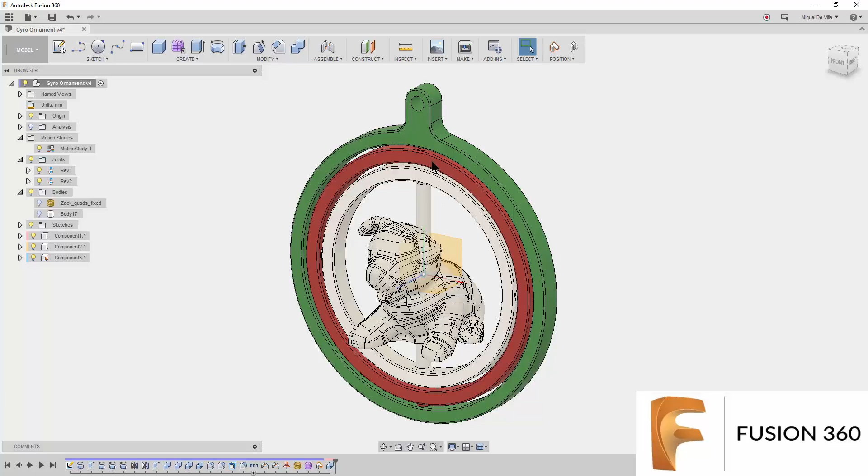Today we'll be dealing with the topic of scan data, how to bring it into Fusion 360, how to work with it, what are the different types, and what are some of the advantages of these different design methods. We'll be making this ornament today. It's a little gyroscopic spinner that has a scanned stuffed toy in the middle.

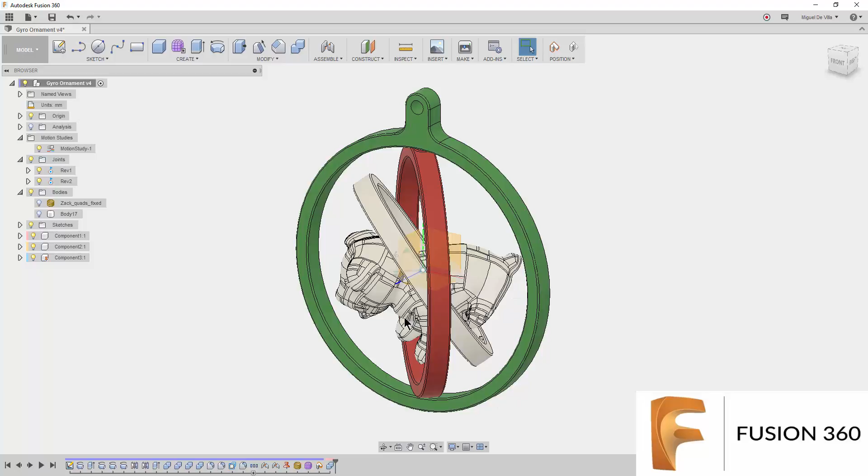So you can easily adapt this design and put anything you want in the middle, and it's just a nice way of integrating something very functional and something very customizable into a single design. So without further ado, let's get started. As in our previous video, we always start with our data set.

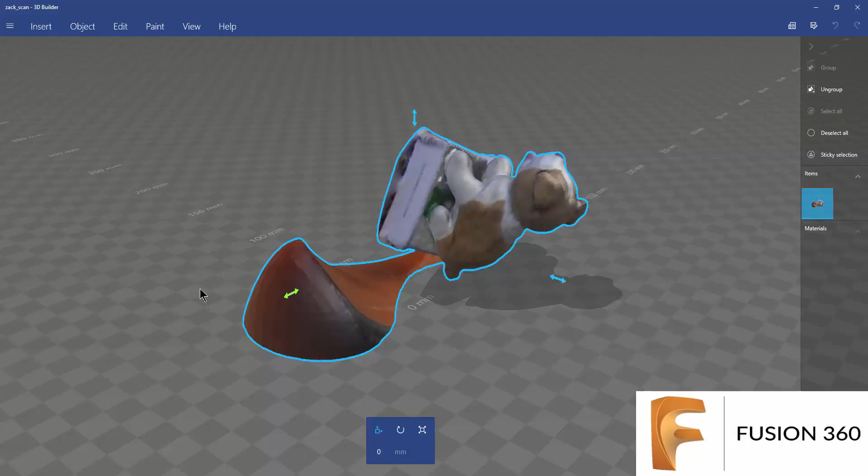For this tutorial, I have selected this dataset. It is a scan I made using an old Xbox 360 Kinect that I hooked up to my computer, and it was of this stuffed toy they had in my workplace. It's nice and cute, but unfortunately, since I had to mount it high up on an orange chair and a couple of boxes in order to bring it up to the Kinect sensor height, I captured a lot of unnecessary detail that I'd like to remove before I bring it into Fusion 360.

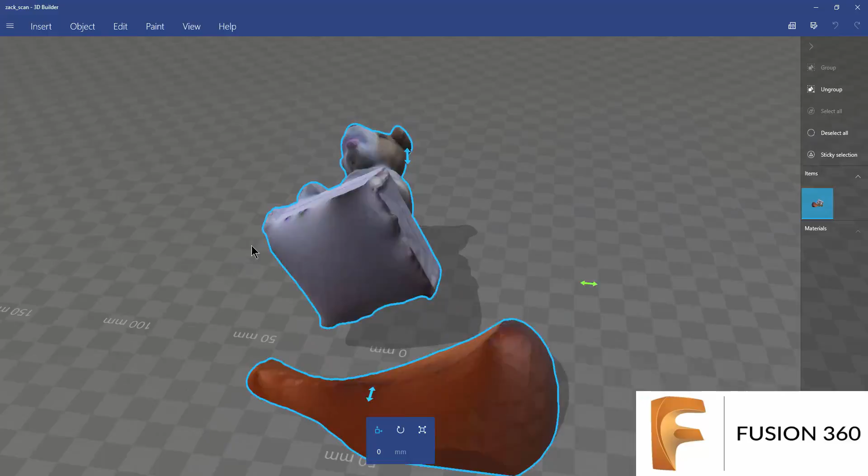We'll be using ReMake for that, and as you must know, just because we see that it's nice and clean and apparently solid doesn't mean it's quite ready to bring into Fusion yet, even if we do remove all the extra parts. There could still be a lot of holes, intersections, and just general particles throughout this model that would make it difficult for Fusion to process.

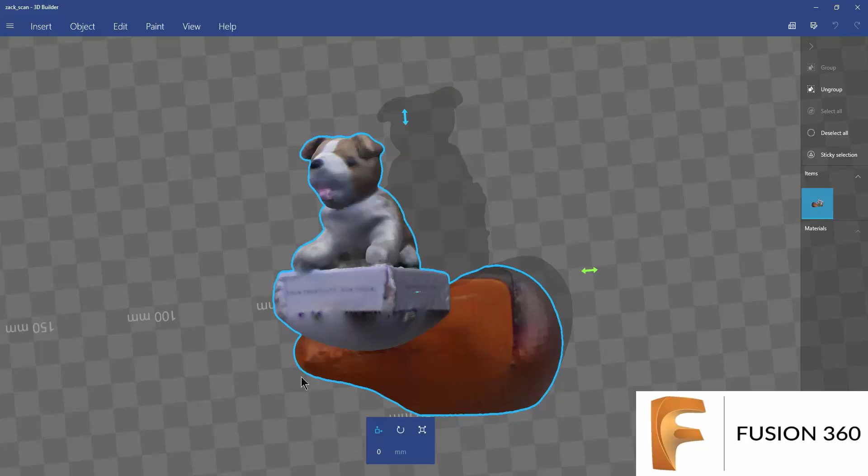What we're going to be doing today is a little different from part 1. We are going to be taking this mesh and turning it into a quad mesh. What is a quad mesh, you must ask? Well, let's switch into ReMake real quick, and I'll show you what I mean. Here's our model in ReMake, and as you can see, it looks roughly the same, except just without color. So let me switch over the visualization and bring up the wireframe, and you'll notice that it's made of a ton of triangles. What does this mean?

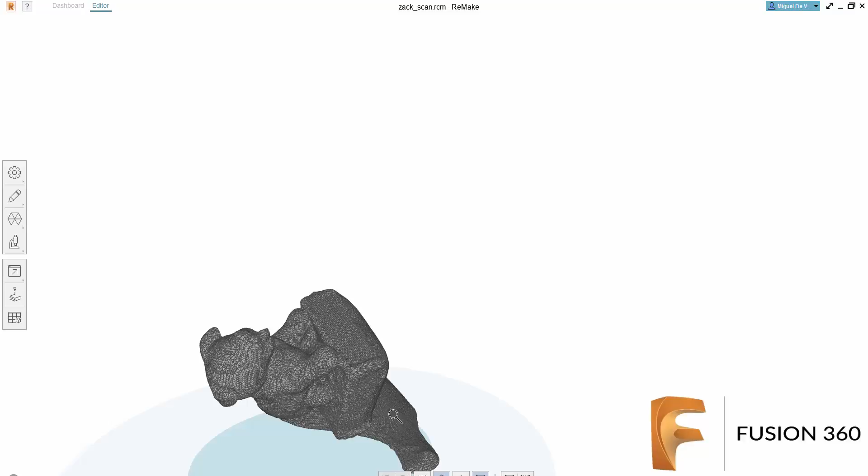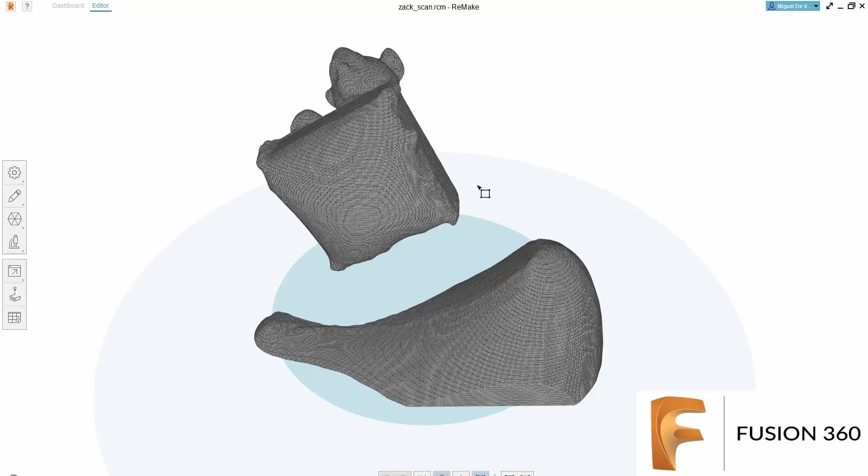Well, much like how objects on your screen are represented by pixels, almost all 3D objects and models are created of polygons. There are two very common formats. One is a triangle mesh, and the other is a quad mesh. As you might be able to tell from their names, a triangle mesh is made up of tons of tiny triangles that connect to each other. These are generally advantageous when you want to capture very fine curvature and detail.

However, they are much harder to work with in terms of meshing because you are only able to use tools like, say, Meshmixer, where you can push, pull, and extrude, and it's not necessarily parametric like we're used to modeling in Fusion. Quads, on the other hand, are, as the name implies, made up of tons of tiny squares.

What they lack in the ability to capture detail due to the need for these squares to be uniform in order to complete a solid mesh, they make up for in what they can be converted into. Very often they can be converted into these things called T-splines, which you should be familiar with if you've spent any time in the Sculpt environment in Fusion, as well as Maya or 3ds Max. These modeling tools use these T-splines so that you can push, pull, and do various other transformations very easily onto these shapes. That's what we will be doing today.

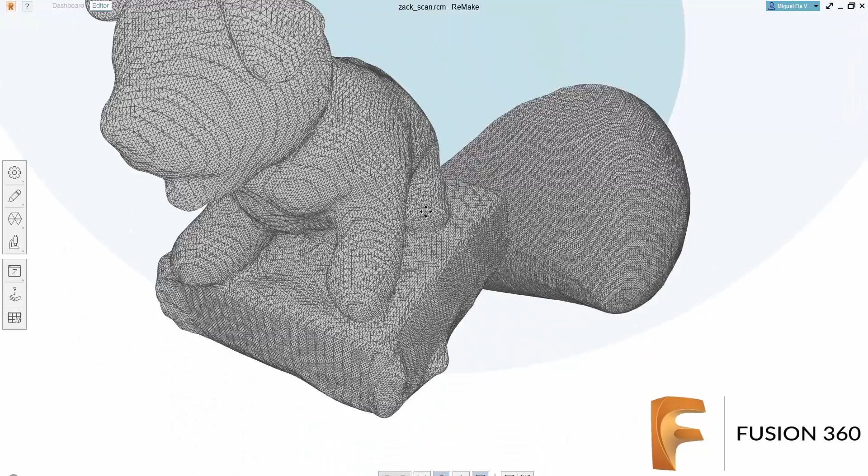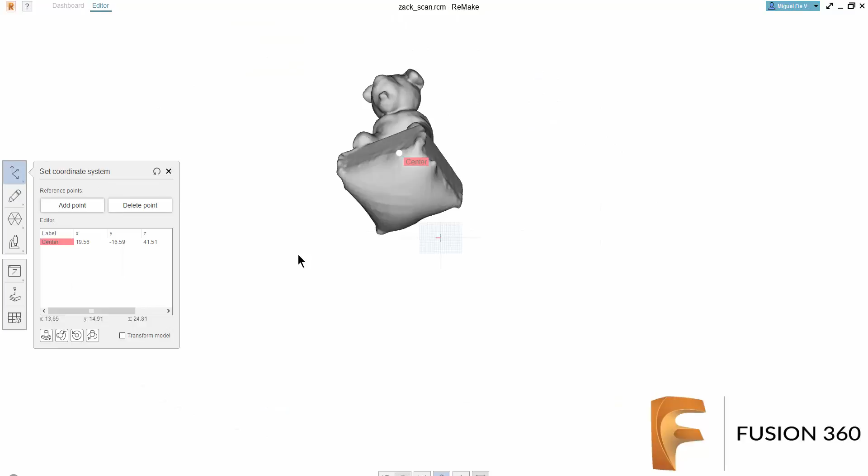We are going to be converting this stuffed toy into a quad mesh so that we can bring it into Fusion as a T-spline body and as a solid. So, without further ado, let's get started. We'll use the lasso tool to quickly select out this huge particle. To make things easier on ourselves, we're going to reset the coordinate system very quickly.

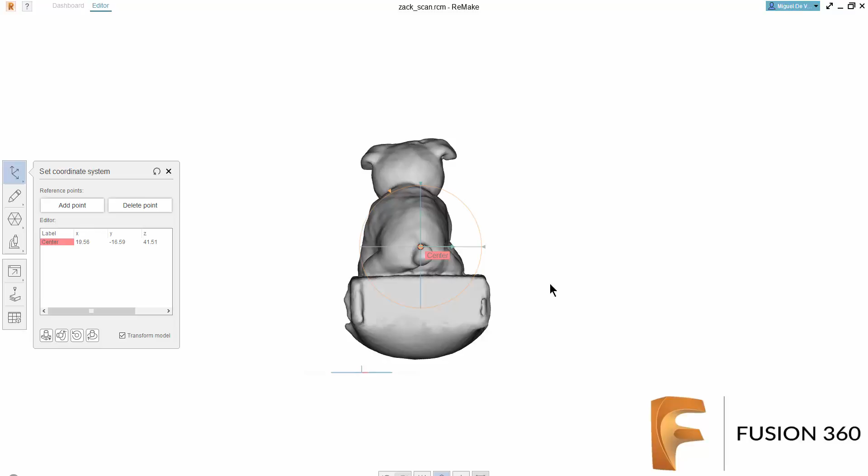And you don't have to do this. I just like to do this because I find it makes modeling a lot easier if everything is right side up, like it should be. And you don't have to be precise. Just good enough is fine. So we're going to use the slice and fill tool to quickly remove that box portion.

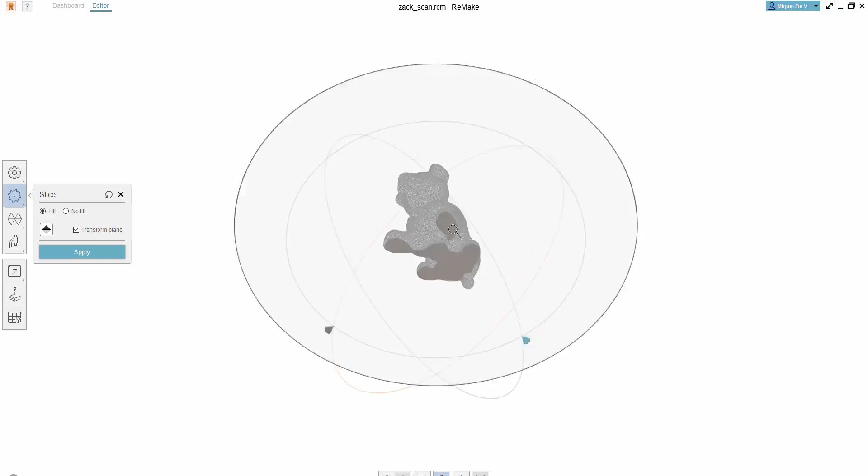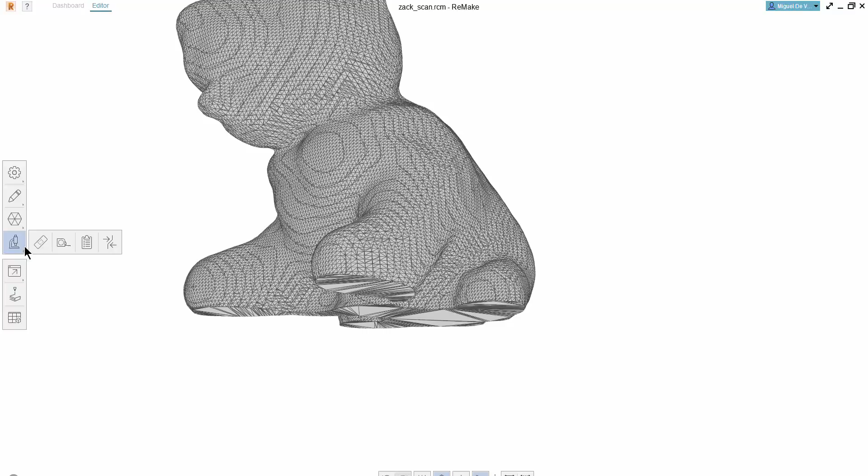Let's orient ourselves a little bit. And what this will do is it'll cut off that portion of the box there and seal up the bottom of this file. Because what we always want is a solid watertight mesh, meaning there's no holes, particles, or intersections. Hit apply, make sure it fills, and boom, we seem to have a solid mesh. Let's run through the analysis portion, make sure everything's all right.

Okay, it looks like no model defects have been detected. And what we'll do now is, under export, we have a bunch of different options: image, video, model. We want to export the model as OBJ quads. You'll notice that under quick export, it already has it. Remake is familiar with this workflow and supports exporting out into OBJ quads for Fusion 360.

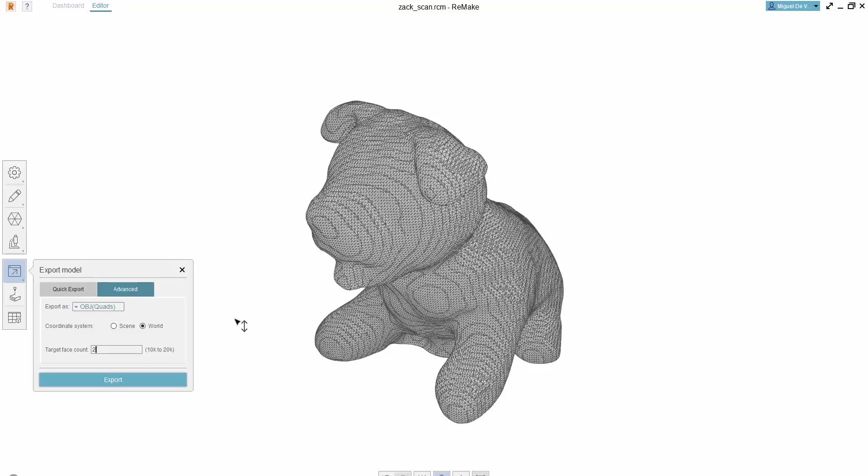The maximum right now is 20,000 faces, so we're going to go into advanced, select 20,000, because we want good quality. Because the more faces you have, the more detail you can capture, even if it means a little more processing time. Now I would normally hit export and just let this wait. This can be a very time-intensive process because it has to retopologize and redraw this entire shape with as little error as possible.

So what I've done is I've prepared what this will look like once I convert it the first time. So let's open that up. And I renamed it Zack Quads. Always good to rename your files appropriately. Don't save.

Excellent. Now you'll see that it looks a little, shall we say, lumpier, a little smoother. And this tends to happen when you retopologize something into quads. It just loses a bit of resolution. Especially since, if you noticed earlier, we had 80,000 faces, and we just decimated that down to a quarter.

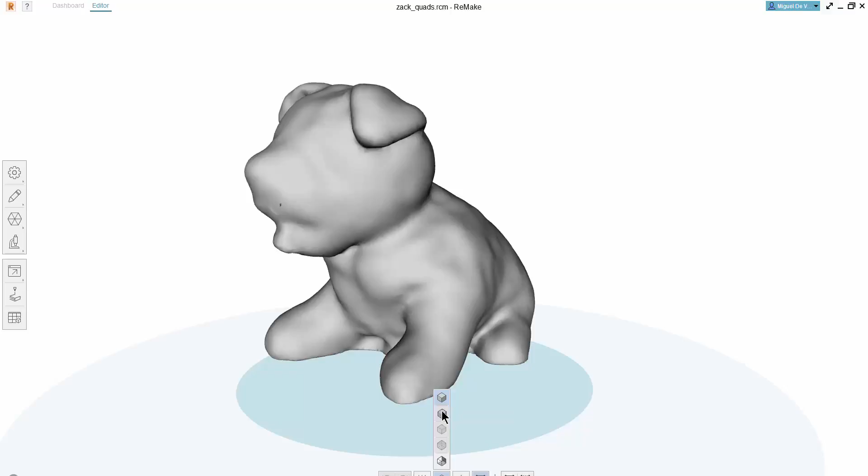You'll notice that it seems to still be in triangles. Well, don't worry. If we look at the solid again, and just try and take a peek at the mesh, you'll notice that it generally looks a bit squarish. Remake likes to auto-convert all these square polygons back into triangles for its mesh editing tools. But believe me, it is still a quad mesh.

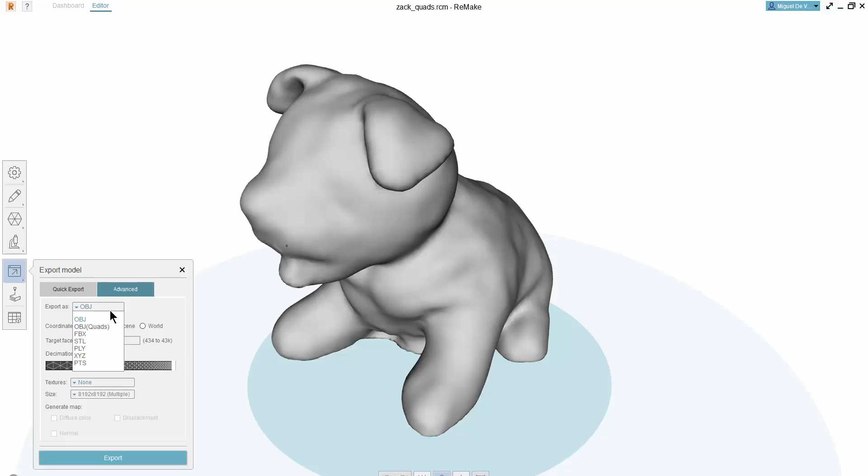However, because it had to redraw everything, it may have committed some errors. So what we need to do is we need to re-export this out. It's the same process as before, after we detect and analyze any issues. There we go, there's one issue. And oftentimes, especially when you are converting from much larger meshes, there tend to be a higher number of issues like these.

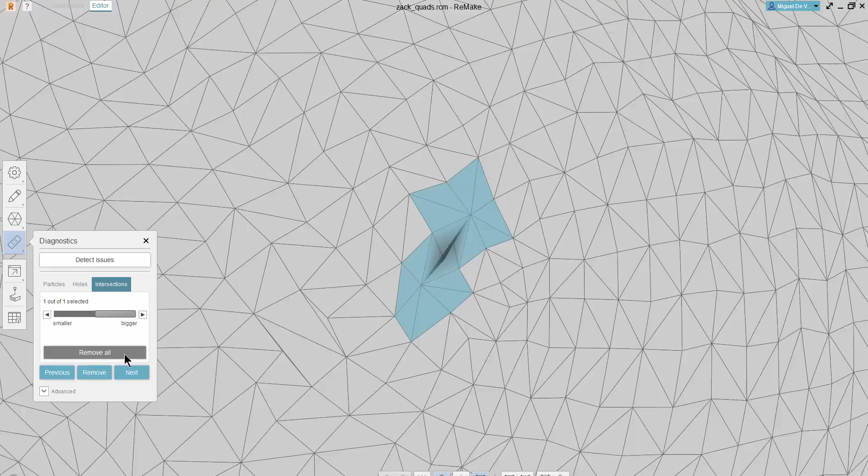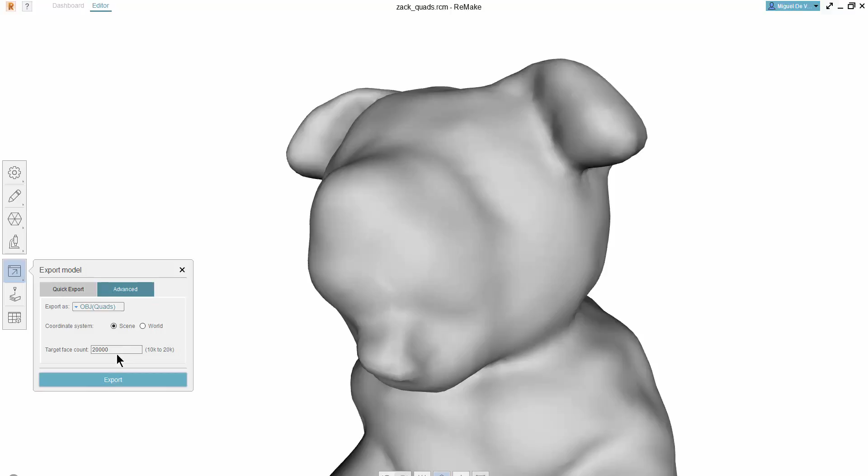So, just like before, remove all, and detect issues again, and just keep doing this until all the problems have been resolved. And once you have that clear message right there, you just need to re-export. Select quads again, it's the same number of faces, and it won't touch what it's already fixed. It'll just redraw those portions that you had to repair, and hit export, and there we go.

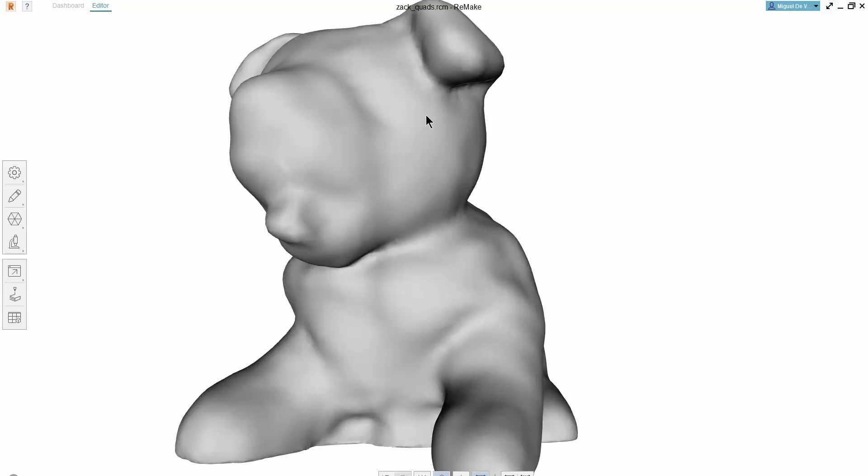Like I said, this can be a very time-intensive process, so I encourage you to be patient. However, in the interest of time, I have prepared and saved a fixed version to show you what it looks like. Notice that it looks virtually the same. That's because Remake didn't touch any of the squares that it already fixed.

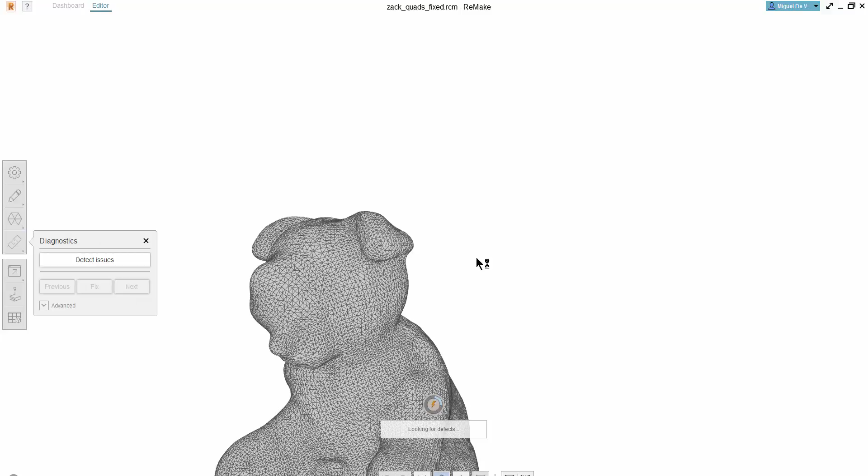However, if we run detect issues, we'll notice that it has no issues. Perfect. This is exactly what we want, bringing it into Fusion 360. So let's switch over to Fusion and we'll get started.

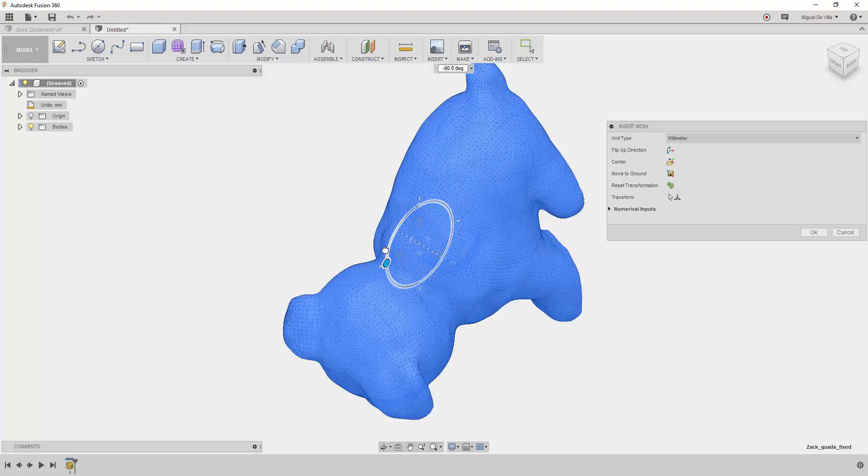Okay, so we're here with a new design file in Fusion. So what we want to do is, just like before, insert mesh, find our fixed quad OBJ, which I've named Zack quads fixed. Name yours whatever you like. You'll notice that this is strange. It has once again turned into triangles. And we can't work with this. So how do we fix it?

Well, this is something I ran into a lot previously until I figured out this quick fix. Under Preferences and the Mesh category, you'll find that this is checked. This is called Triangulate Mesh Polygons. Similar to what Remake was doing earlier, Fusion is automatically converting our quads into triangles so that its native mesh editing environment is able to process it as well as edit it.

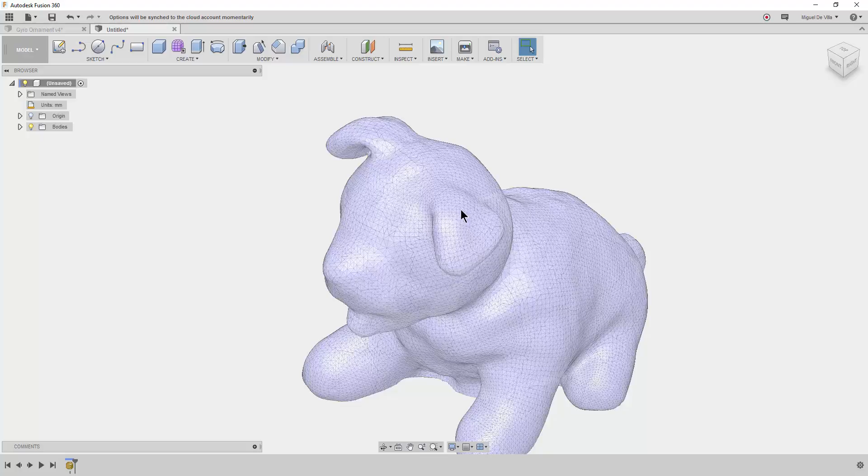Well, normally this would be good because we want to work with meshes and fuse them together and mix them up. For this purpose, it's actually preventing us from doing that. So we're going to uncheck, hit apply, OK, and re-import the mesh.

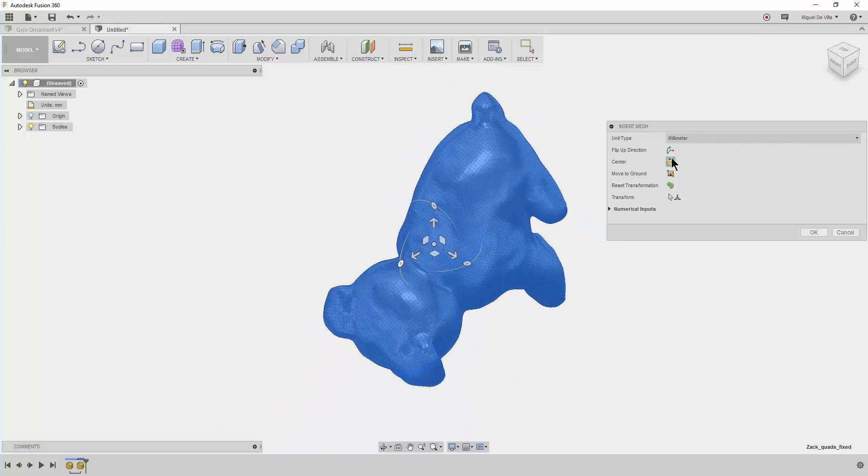Notice that now everything looks nice and proper. It's all squares. This is exactly what we want. So I'm just going to hit center because I like things to be nice and centered about the origin. Rotate it so that it's nice and straightforward. And we now have a quad mesh in Fusion.

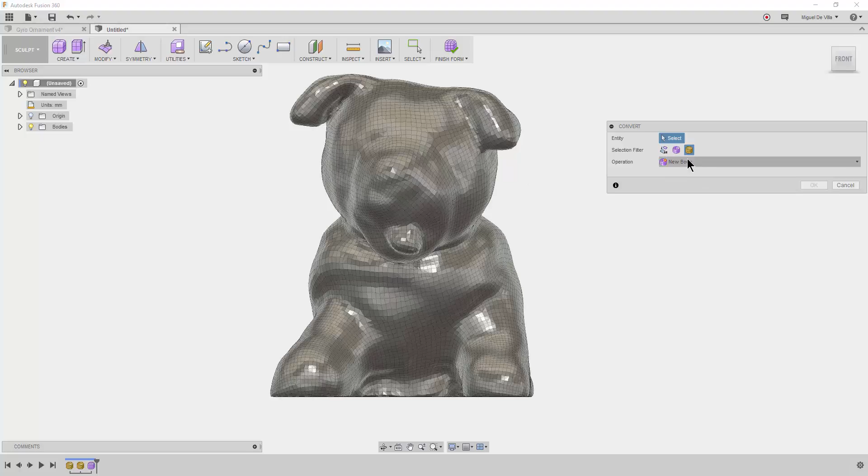What we need to do now is go into the form environment, because we need to convert this into a T-spline. So we go into Utilities, Convert. Make sure to have the Mesh Body selection filter on when you do this, otherwise you'll have a hard time selecting, like so. Make sure you have Mesh Body selected, and you only have one operation, which is to make a new T-spline. Fine. Hit OK.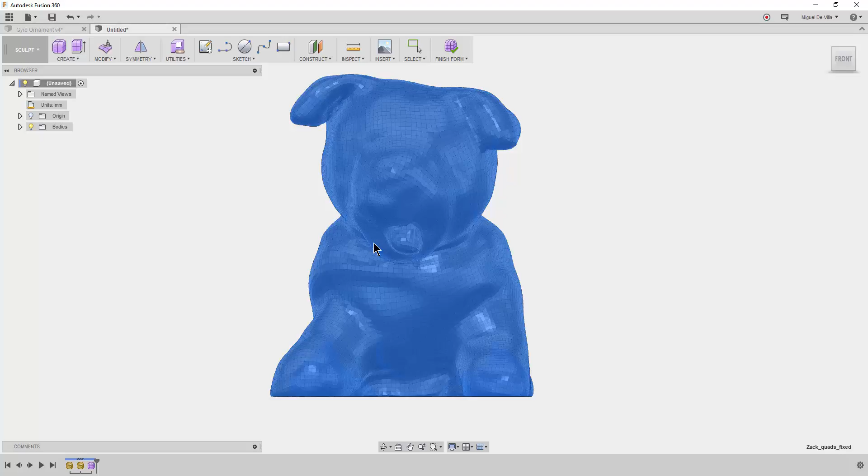It has a center of mass. It can be cut. It can be extruded into. It can be made parts of joints and assemblies. This can be fully integrated into your design. And that's one of the benefits of bringing it into a T-spline body before messing around with it.

Unlike our previous workflow, in order to get any functional components, we not only had to reconvert everything back into a mesh, but all the parts we had designed in the parametric modeling environment, or model, were lost because we had to delete our design history when we converted everything back into meshes for the last step of combination.

Here, once we have a nice complete T-spline body, we no longer have to exit the design history. We can just keep it on the entire time, which can be really useful for a lot of designs because having a design history means you can backtrack and edit that much more efficiently.

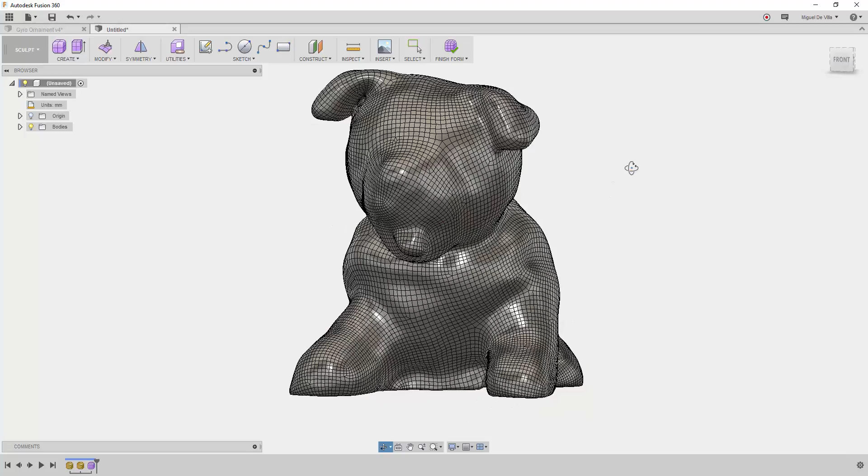So now that this is finished, you'll notice that it looks pretty good, pretty fixed, but don't let appearances fool you. When you have like 20,000 faces, it's easy to overlook one or two little points that are overlapping and preventing you from turning this back into a solid.

So what we're going to do is under Utilities, Repair Body, select this T-spline body and just let it recognize any and all points of conflict or error that are preventing you from reconstructing this back into a body. And you see that it found quite a few. Just make sure auto repair is on and it'll do its best to fix all those error points, or error stars rather. And you'll know it's done when OK starts to light up again, and you can just press that.

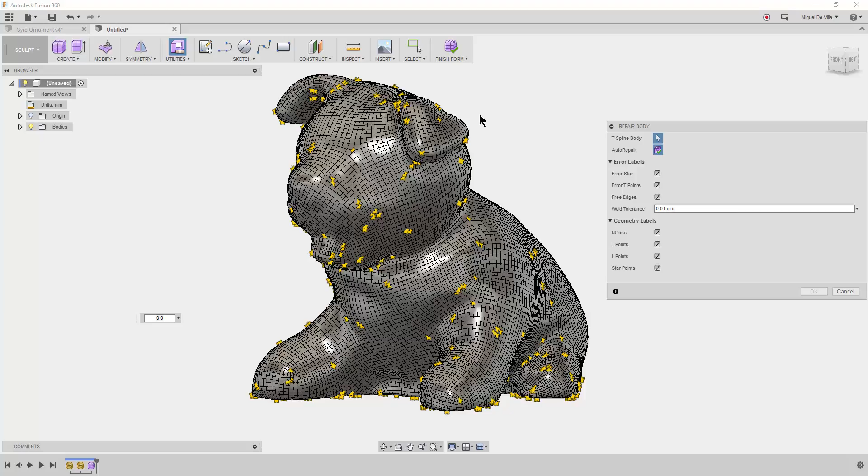Fantastic, it's finished. And now, as a quick check to make sure that we have successfully converted and fixed all the errors of this mesh, we're going to hit Finish Form, and if it reconstructs back into a solid without any error messages, we know we've done it.

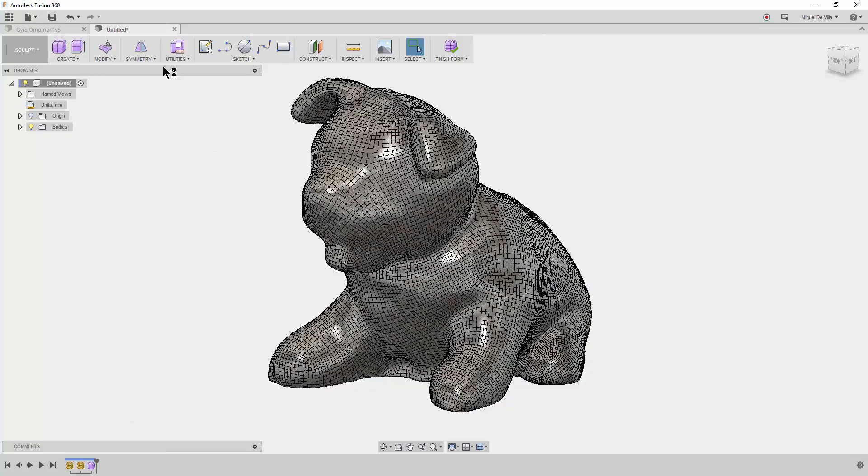It looks like our model has successfully reconstructed back into a solid, and as I mentioned previously, one of the advantages of this method is that if we edit the sculpt feature in the timeline, we have access to all the different sets of tools in the sculpt environment to apply to our scanned data over here, which can be really useful if you want to touch up certain portions or change it up however you wish.

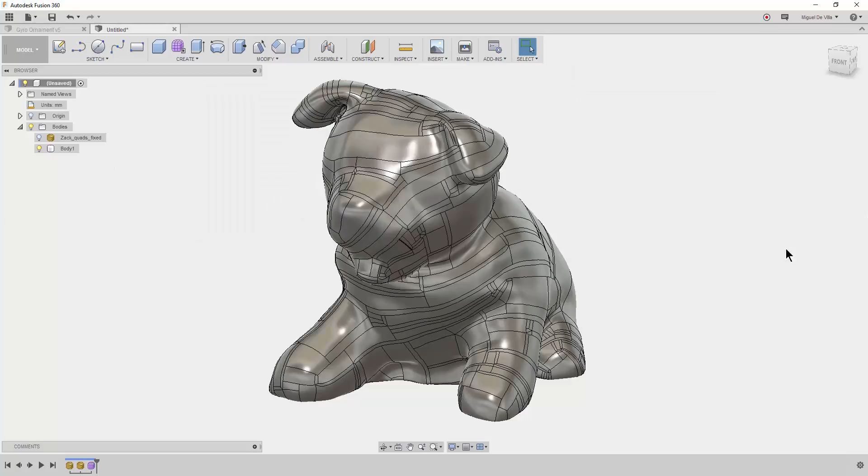And in short, that's how you bring scanned data in OBJ quads, and then T-spline bodies, and finally solids into Fusion 360. And since it's a solid, we can run the center of mass script like we did in part 1, find its center of mass, and move it to the origin so that we can begin sketching that gyroscope that I showed you earlier.

And at this point, hope you don't mind, but to speed things along, I'm just going to speed up the video from this point on to show you how I sketched the gyroscope as part of this model. Stay tuned.

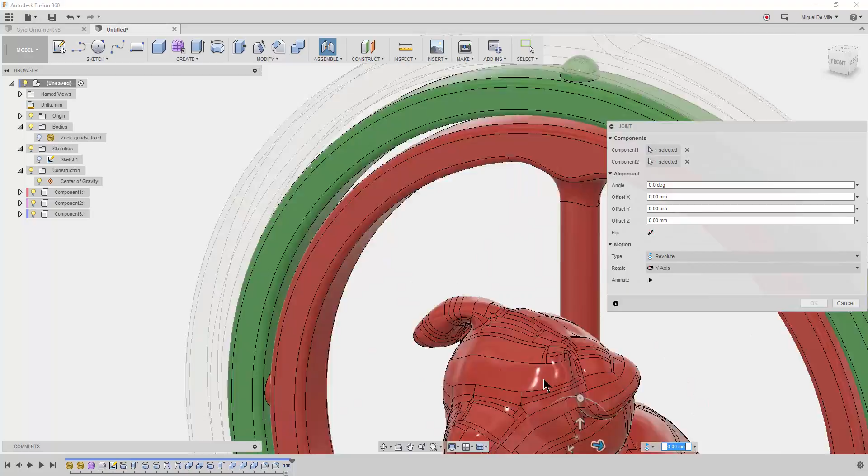And there we have it, a completed gyroscopic ornament that's balanced about the mass of the scanned object.